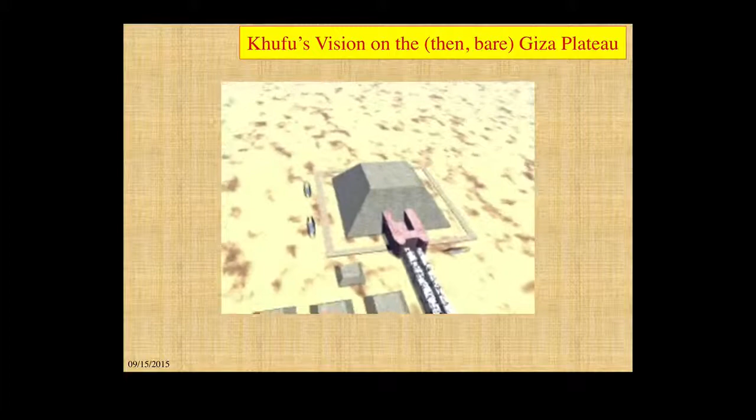What was Khufu's vision of the then bare Giza Plateau, where he wished to be interred in a magnificent complex? In his mind, it probably looked something like this.

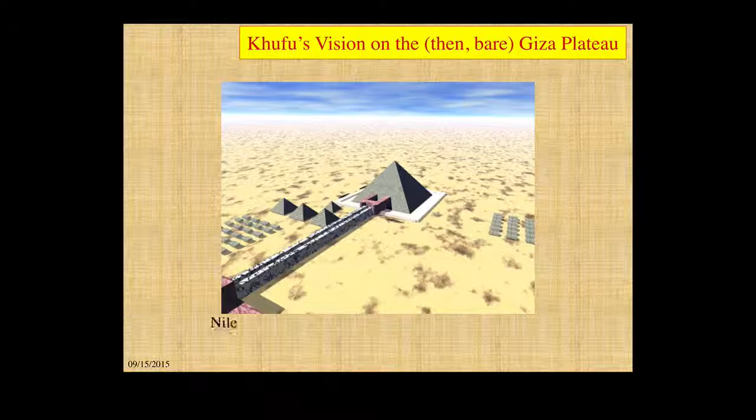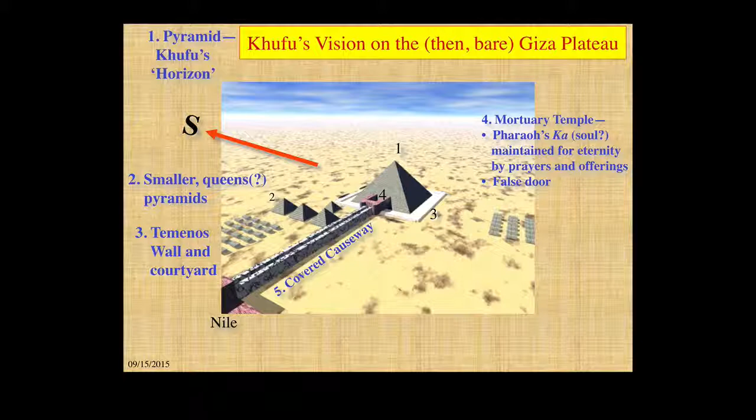It was on the west bank of the Nile, and there was, of course, the pyramid, Khufu's horizon, or Akhet Khufu. There would be smaller Queen's pyramids, a Temenos wall and courtyard, a mortuary temple, a covered causeway for ceremonials, a valley temple, Pharaoh's Ka pyramids, and the city of the dead's nobles' tombs.

And of course, because we were in the middle of switching over from a stellar to a solar mythology, there would be solar boat pits buried in several spots.

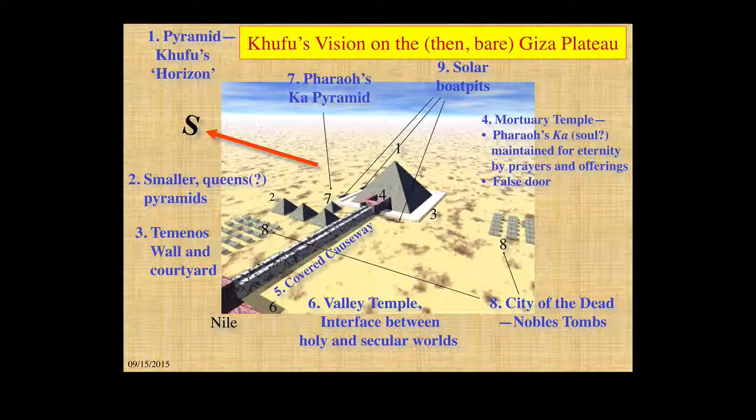So it would appear there was much more to any pyramid complex than just the pyramid. The complex was a psychic projector to preserve and project the king's Ka, his psyche, to the netherworld so that he could negotiate with the other gods by night to ensure a good inundation, on which the whole of Egypt, Kemet in their words, depended, and also to oversee and protect his people throughout Upper and Lower Egypt by day.

The architecture of the pyramid had to serve these essential purposes of the dead king, as well as preserving his remains, his mummy, in his sarcophagus.

The energy to drive this enormous psychic projector was to be provided by a full-time priesthood, with offerings, lustrations, prayers and ceremonies to support, enable, project and recover the king's Ka.

The architecture of the pyramid complex as a whole had to support the priesthood with their ceremonies both during the interment and for 1,000,000 years after.

Akhet Khufu was to be a living, breathing, functioning organism for all time, rather than the naked, partially demolished stone structures we see today.

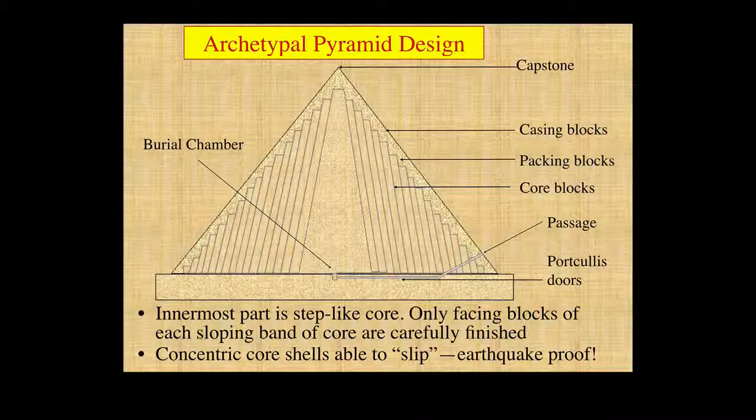Over several hundred years, they had developed the ability within ancient Egypt to build in stone, and they had built many pyramids previously, particularly during the reign of Khufu's predecessor, King Snefru.

He had built pyramids at Meidum and notably at Dashur, and the pyramid design had evolved partly from trial and error, to be honest. And the basic pyramid idea was something like this shown in the diagram.

There was an innermost part, a step-like core. Now this core consisted of a number of concentric shells. The sloping bands were all carefully finished so that they were able to slip relative to each other, and as a result they had become earthquake-proof.

Outside of the shells there were packing blocks to fill in the steps, and then casing blocks of white Tura limestone on the outside to give the impression of impregnability and purity. Oh, and the capstone was probably going to be made of gold.

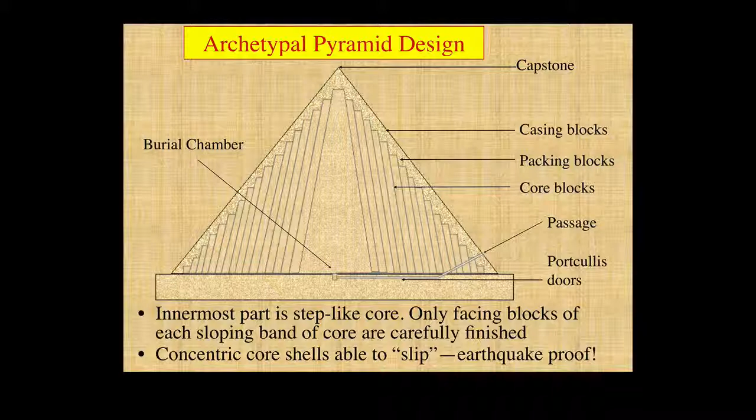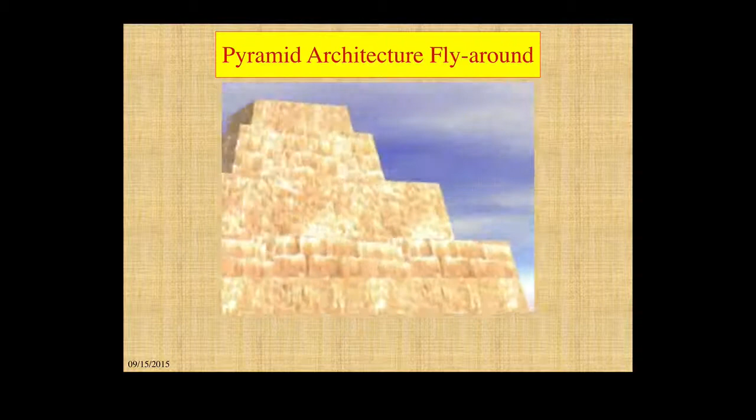We architects love little gimmicks like this one, an architecture fly-around. And that showed the sequence of events in rather rapid order. Notice the gold pyramidion at the top.

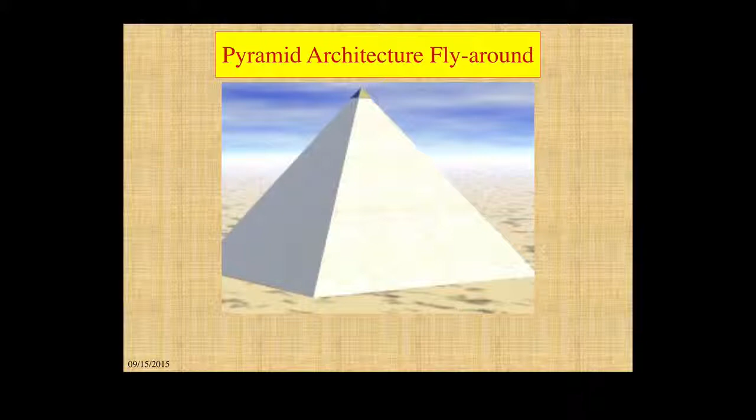That's Khafre's pyramid. And this is systems engineering, Egyptian style. So, models, plans, and the all-essential operations research, which in this case will be carried out really by dynamic modelling.

This is Hemiunu's plan, my plan if you like, system creation without reduction. And we can see that things happen in some sort of order: 1, 2, 3, 4, 5 and 6.

So 1 is establish the customer and user wants and needs. We've seen some of that already because they contribute to conceiving a future vision with the customer, Khufu.

3, establish the emergent properties of the future vision. 4, conceive strategies to realise the requisite emergent properties. And 5, select, correlate, resource and pursue effective strategies to realise those emergent properties. And in the doing of that, we will realise the future vision.

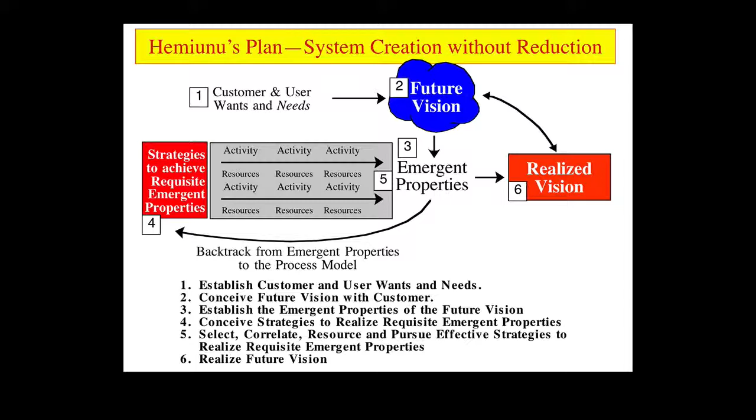Quite straightforward, but there's no reduction. It's all synthesis from the word go.

So, conundrums. How long to raise a pyramid? How many workers? Will those workers work all the year round or just during the annual corvée, which was expected to take place during the inundation?

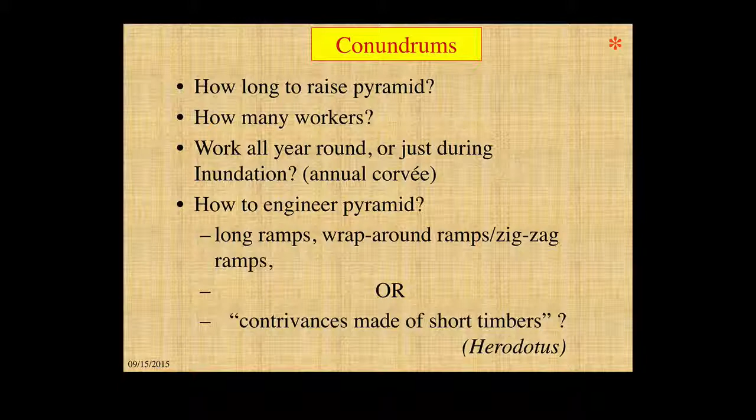How to engineer the pyramids? Would they use long ramps, wraparound ramps, etc.? Or something else? Perhaps contrivances made of short timbers? So, this operations research. Let's have a look.

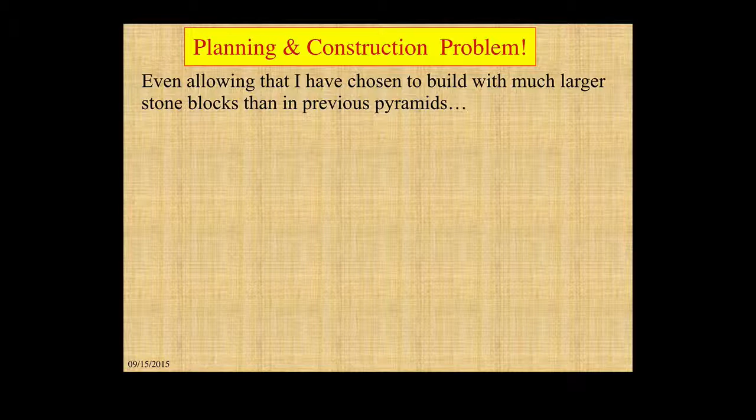There's an obvious planning and construction problem, even allowing that I, as the architect, have chosen to build with much larger stone blocks than in previous pyramids, thereby cutting down the number of blocks. Raising Khufu's pyramid will still take 2.3 million stones at about 2.5 tons average, and that will take 20 years.

Going at 360 days per annum, 10 hours per day, that's 36 stones per hour continuous on average, but that works out at being about 90 tons average per hour continuous for 20 years. That's some loading. During the early phases, it's going to take 200 tons per hour or more in early construction to achieve the 90 tons average long term, because once you get to the peak of the pyramid, towards the tip, you can't load up at 90 tons or anywhere like it. So on average, 200 tons per hour in the early construction area.

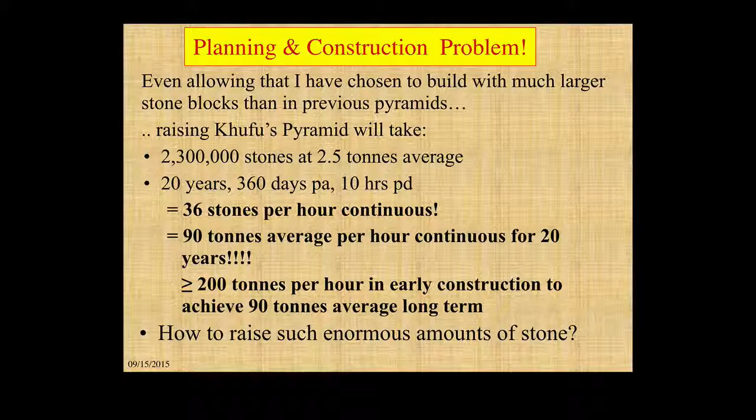How can we possibly raise such enormous amounts of stone? And of course, if one watches lots of Hollywood movies, you end up with the idea that the answer obviously is a ramp. Ramp theories. What have we here?

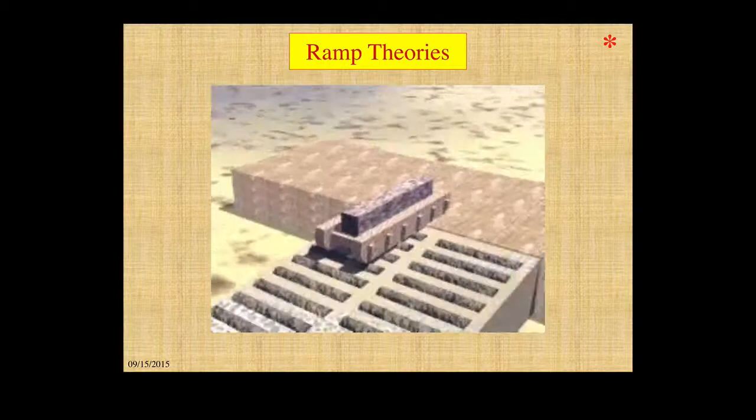The ramp slope, by experiment, has to be less than about 8 degrees. Any greater slope and it becomes too difficult to haul the stones against the severe friction. Ramp remains have not been found at Giza. They have been in other places, and particularly near quarries, but not at Giza by the pyramids.

You can see from the diagram and from the previous video that straight ramps can become enormous as the tiers rise. The whole ramp has to be raised in order to not exceed the slope. You can't just raise the bit near the pyramid. So straight ramps are out.

So the ramps could progress around the pyramid, one from each corner, or zigzag on one face as shown. Note the need for substantial corners to turn stones, which if they're being dragged on sledges, could be anything up to 33 metres from start to finish, which makes for a big corner. As the tiers rise, also, the slope length shortens, and either ramps will become too steep or the tiers must become progressively shorter and stubbier.

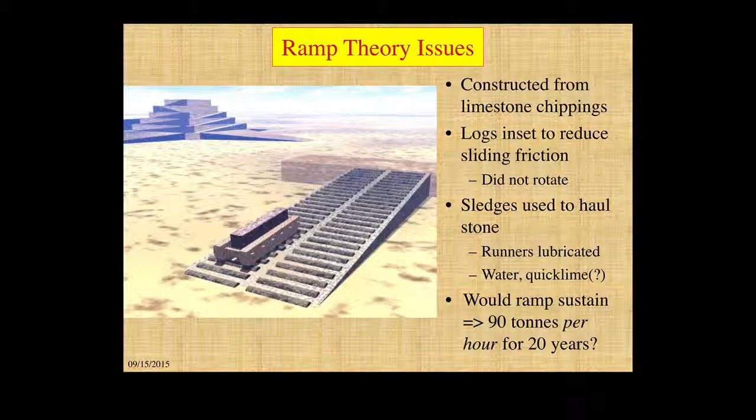Would a ramp built like that sustain more than 90 tons per hour for 20 years? It really doesn't stand up, does it? So there are too many unanswered problems with the notion of using ramps for such a large structure over such a long time. And that's in addition to there being zero evidence of any ramps having been built or used at the site of Khufu. There's no remains, nothing. Perhaps it's time to dispense with the whole idea.

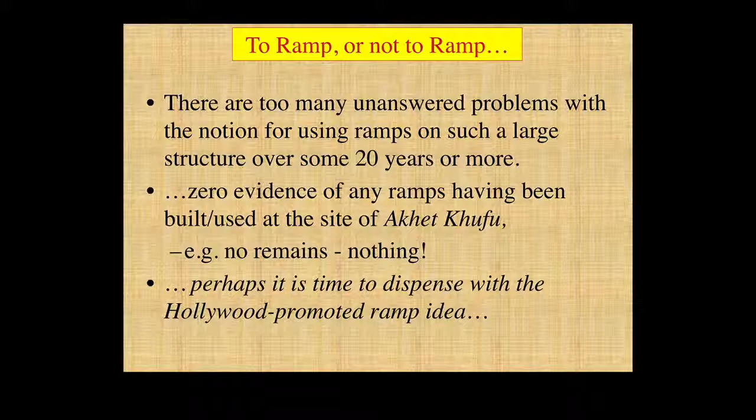Back in 440 BC, which is going to be way ahead of my time, of course, the pyramid was built in steps, battlement-wise, as it is called, or according to others, altar-wise. After laying the stones for the base, they raised the remaining stones to their place by means of machines formed of short wooden planks, which can also be translated as contrivances made of short timbers.

The first machine raised them from the ground to the top of the first step. On this there was another machine which received the stone upon its arrival and conveyed it to the second step, whence a third machine advanced it still higher.

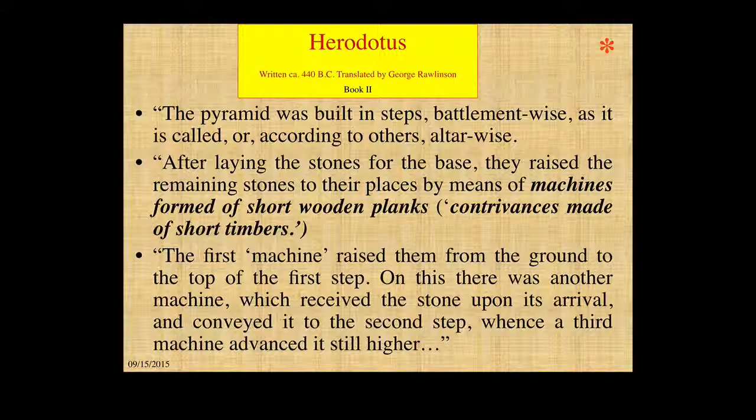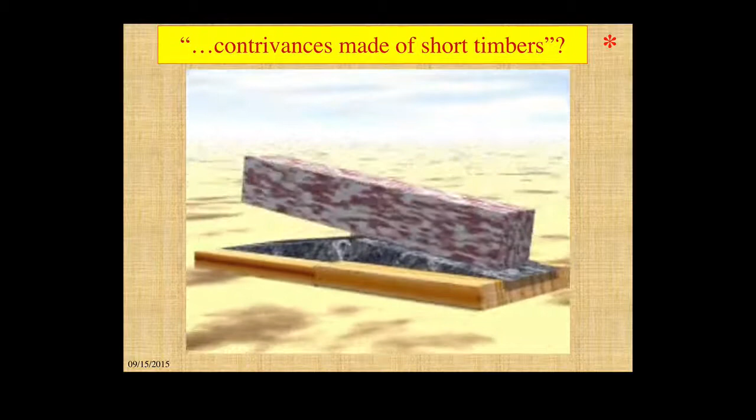So, contrivances made of short timbers. This is one, and this process is sometimes referred to as cribbing. You can imagine men on top of the beam going from one end to the other to tip it.

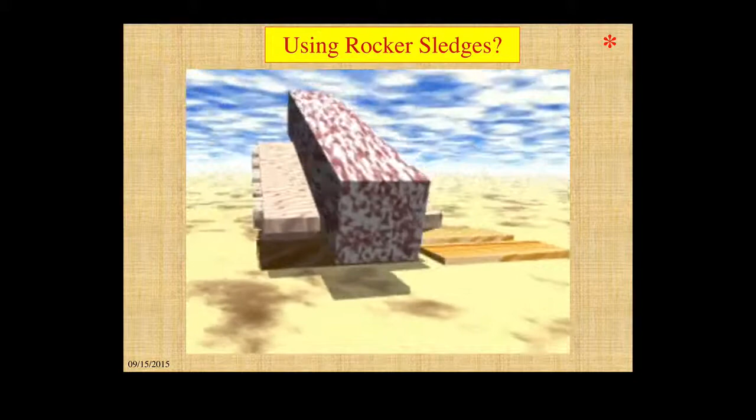Or we can use a rocker sledge. Both these methods are slow but steady and can be very effective. And then the rocker is used to move the stone as well.

If we imagine the stones being moved without the men, it might look rather crudely something like this. There's 3 teams in parallel, raising stone with another team behind, raising more stones, and so on. Tier upon tier.

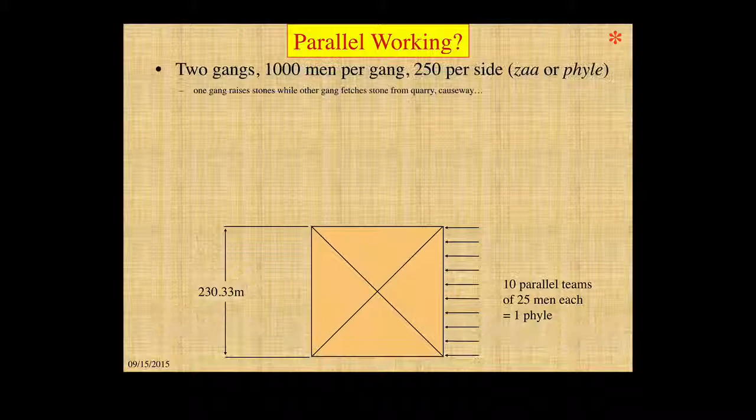And so we can consider parallel working using this cribbing method. As you can see, we could have as many as 40 teams, each raising about 2 tons per hour, which is steep but feasible.

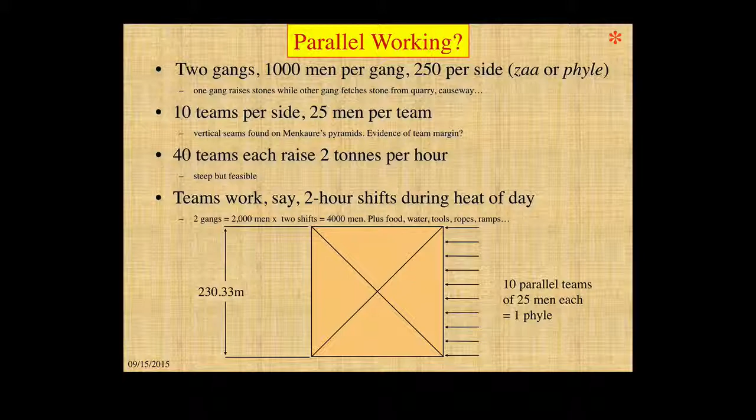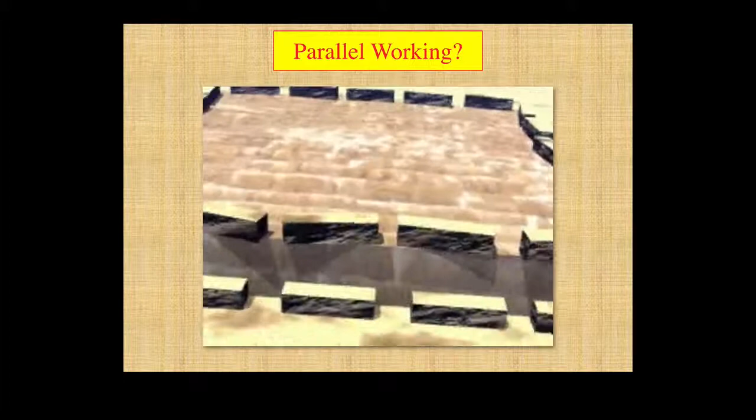And if it's working on all sides, it might look rather crudely something like this, all happening at once. So, needs, requirements, and emergence. Let's look at the central concept of emergence.

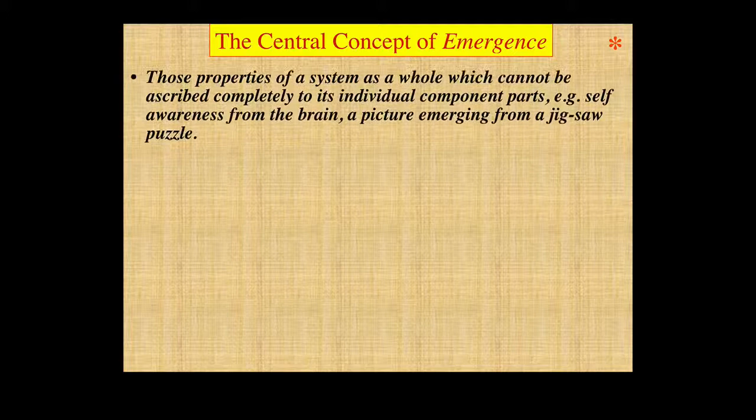Emergent properties are those properties of a system as a whole which cannot be ascribed completely to its individual component parts. As an example, let's look at vehicle emergent properties. They can be physical properties, functional properties, temporal properties, aesthetic properties, behavioural properties, and value properties. We shall look at some further.

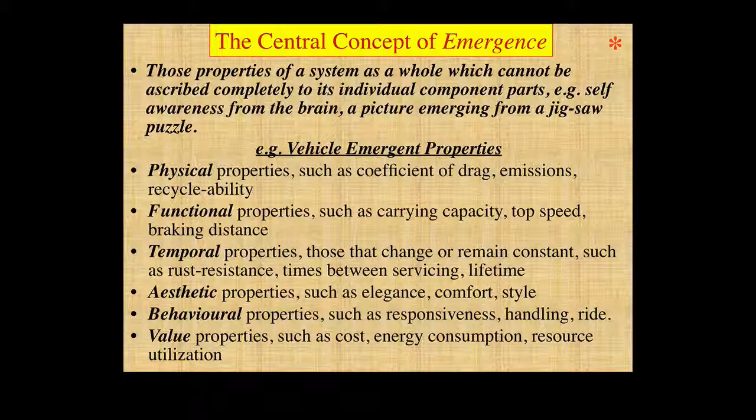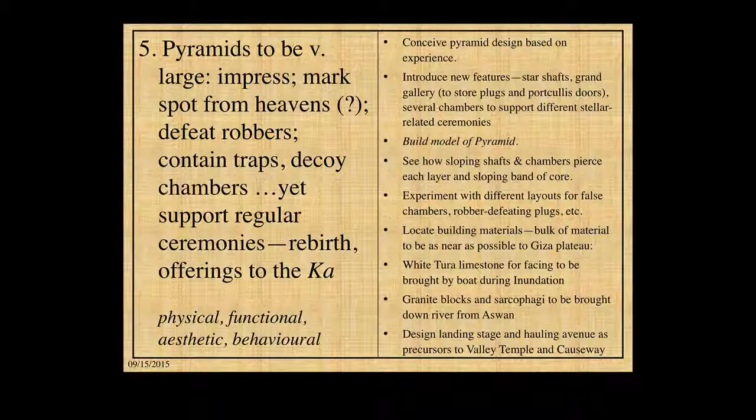The pyramid annually revitalizes the celestial seed. Giza and the pyramids are to contain magic symbols. The pyramids are to be very large, to impress. There are many strategies and techniques here, including building one or more models of the pyramids, or perhaps parts of the pyramids, as we shall see.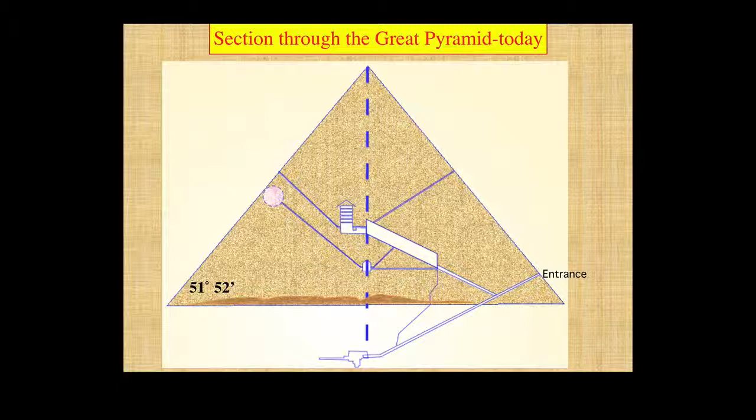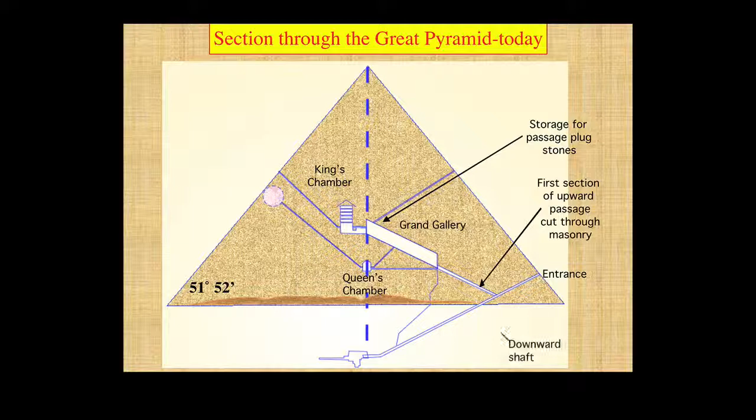This is a section through the Great Pyramid as we might see it today. We would see the slope as being about 51 degrees 52 minutes. There's a Queen's Chamber, a King's Chamber, a Grand Gallery, which we see as storage for passage plugs. There are passages downwards and upwards. There's an escape tunnel and a deserted lower chamber.

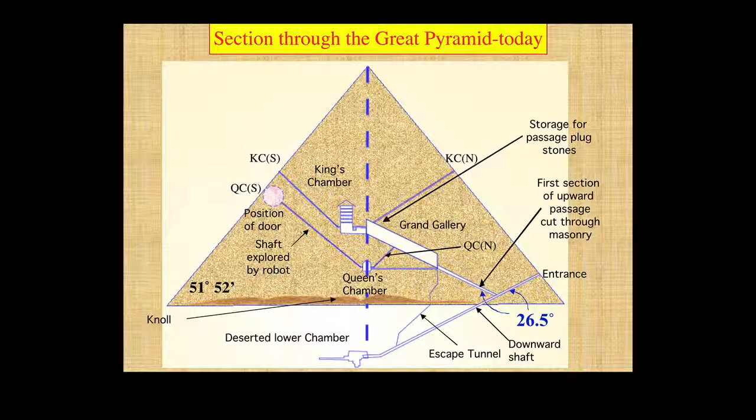There's a shaft that was explored by a robot recently by a young man called Rudolf Gantenbrink, and he found a door up towards the end. The passageways and the Grand Gallery all slope at 26.5 degrees, and there are chambers, Queen's Chamber South and Queen's Chamber North, coming from the Queen's Chamber, and King's Chamber South and King's Chamber North, coming from the King's Chamber. Perhaps a little more to it than we might at first have envisaged.

Those shafts that I've just mentioned, star shafts perhaps, align with the culmination points of a number of distinctive stars: Alnitak, which is in Orion, Sirius, which is the brightest star in the sky, Kocab in Ursa Minor, and Thuban, which then was the pole star. The culmination of Kocab coincides with the heliacal rising of Alnitak, or Orion, or Osiris. Kocab was perhaps to be Khufu Osiris's final resting place in this stellar mythology.

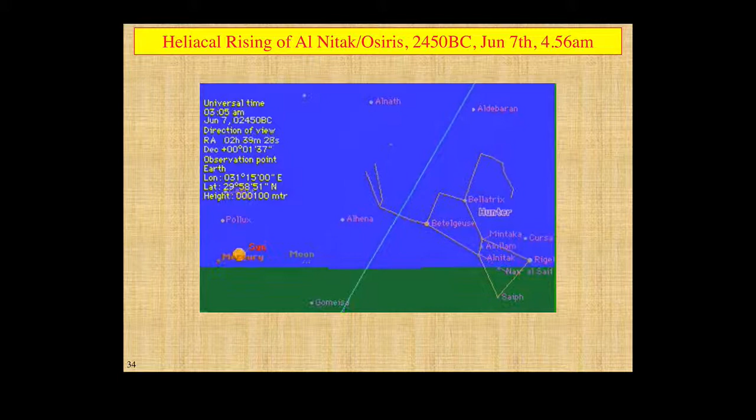Here we see a chart set to 2450 BC, 7th of June, 456, and from that we can see that as Alnitak rises to the horizon, right now so does the Sun. And once again, Orion's nebula and the belt on the right, Alnitak goes up, and once again, there.

Notional Great Pyramid internal structure. You'll find now that the measurements are all in Seked, which you can relate to angle. A seked is given by 7 divided by the tangent of the angle. So 7 divided by tan of 52 degrees gives you 5.5 sekeds, which is the pyramid slope, bottom left-hand corner.

You can see that from the Queen's Chamber we have 2 star shafts, both at 8.5 sekeds. From the King's Chamber we have an asymmetric setup, with one star shaft going to the south at 7 sekeds and the other going to the north at 11 sekeds. And we now know that they all point at particular stars.

I've shown a level there which is not obvious, called the Mound of Creation, which cuts across at the uppermost region, separating the upper from the lower.

Part of ancient Egyptian mythology was that from the primeval waters there emerged the initial Mound of Creation. And this probably happened in Rostau, which is otherwise known as the Giza Plateau.

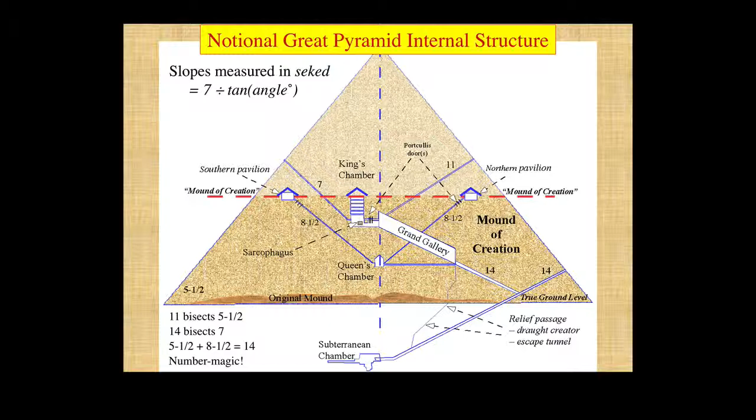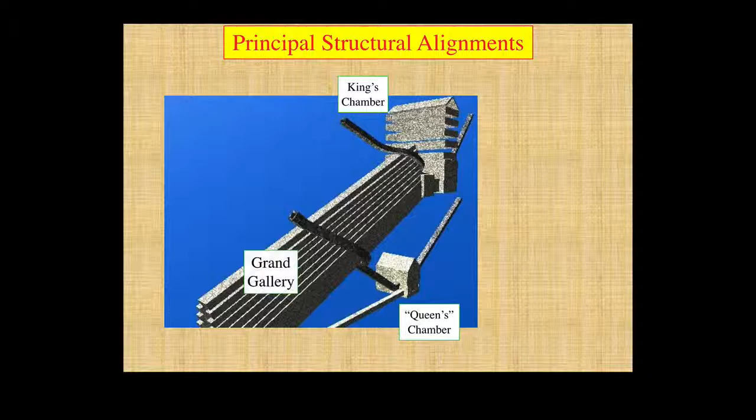Let's look at those principal structural alignments in perspective, because the internal structures are very much coplanar. We can see the Grand Gallery, the Queen's Chamber, the King's Chamber, and the 4 star shafts.

Notice that the northern shafts, the 2 facing us, curve around the Grand Gallery, so they couldn't be used for star sighting, as some people have suggested.

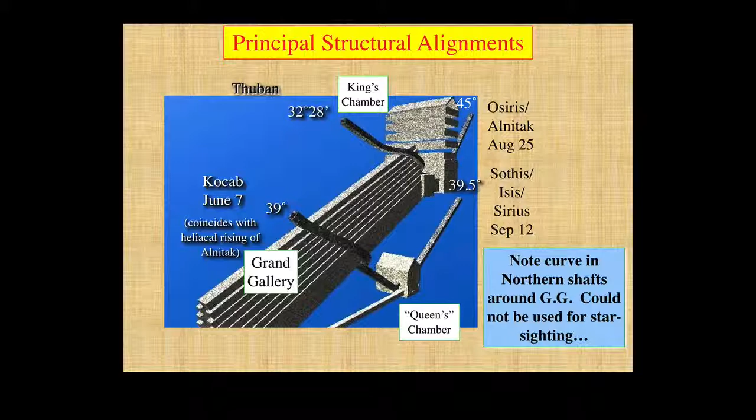There's a list of the annual ceremonies which coincide with the various culminations, and it can be seen that the whole is an annual fertility rite to maintain the fertility and fecundity of Egypt forever.

So the height of the pyramid is 7 times 40 cubit measures, which is 280 cubits. Whereas the half width of the pyramid to the centre line is 5.5 times 40, which is 220 cubits.

Now we've already seen that the slope of the pyramid is 5.5. And if you look at that, it's 5.5 times 40 over 7 times 40. And that is the cubit ratio, giving you the seked slope.

If we start looking at the vertical budget, we can see that above the internal mound that would already exist in there, we get up to the bottom of the Queen's Chamber passage with 43 cubits.

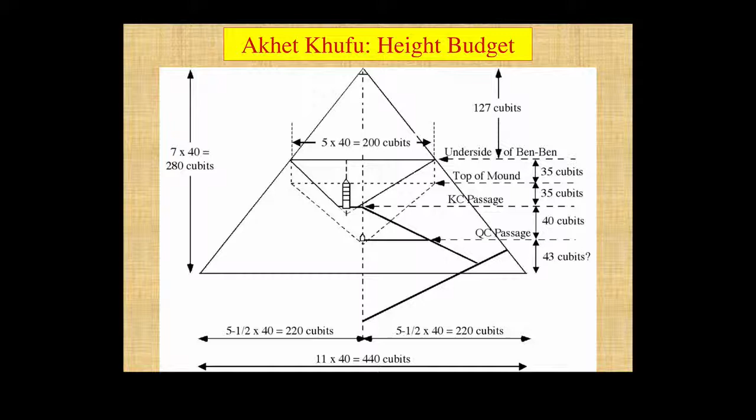To unravel this and see what's going on, let's look a bit closer, and let's look at the Queen Chamber's level just extracted from that diagram. 200 cubits wide, so 100 cubits half width.

The 2 star shafts are both at 8.5 seked, and there's the Queen's Chamber at the bottom, and there's an apparent anchor point just under the Queen's Chamber which aligns both shafts. Very symmetrical, and I've done the calculation of the drop using the Egyptian method.

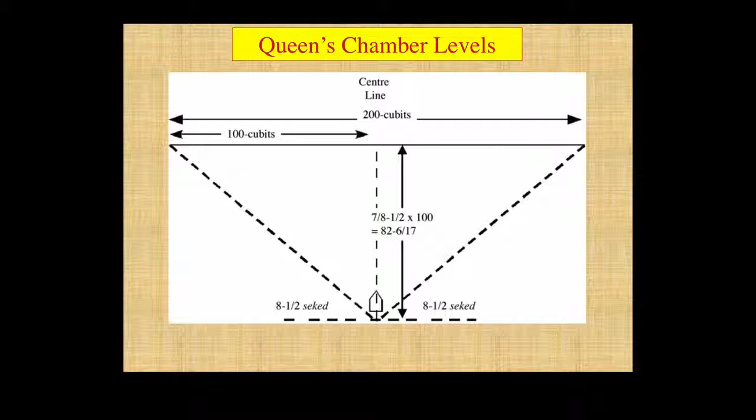That would be 7 divided by 8.5 times 100, which is 82 and 6/17 cubits. And that has to be precise to give you the correct slope.

Now that was symmetrical, but the King's Chamber is anything but symmetrical. In fact, the whole of the King's Chamber and the relieving chambers and the cap on top are all shifted off by a mean of 22.22 cubits to the south, to the left in this picture.

And you can also see that by doing that and having the right drop, you get the 7 seked to the left, to the south, and the 11 seked to the right, to the north, coinciding with another anchor point just underneath the King's Chamber.

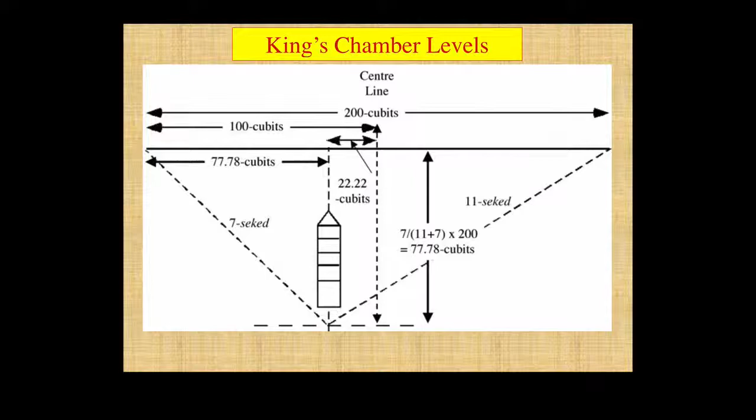And the vertical drop has to be precise again. That's 7 over 11 plus 7 times 200, which is 77.78 cubits. This is delightful work, very accurate and quite elegant.

So how did they go about building that grand gallery? Well, we'll have a look at that in a bit more detail, because this has puzzled people for many years.

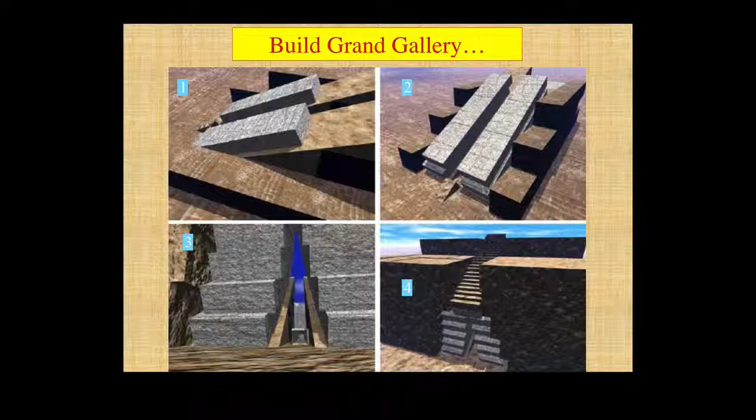Another look at it in perspective, and you can see the rising passage, centre right at the bottom, going into the Queen's Chamber. The actual Queen's Chamber is obscured in the masonry, but you can see the beginnings of the corbels to left and right of the passageway going upwards.

Another view a little bit later on, you can see 4 rows of corbels beginning to get into place, and a staircase having been put in the middle.

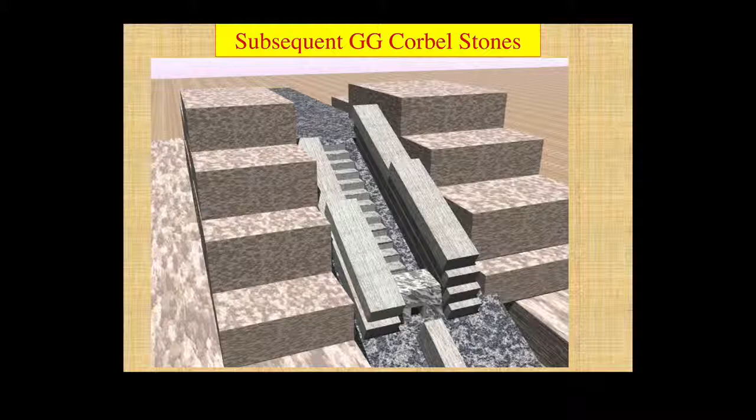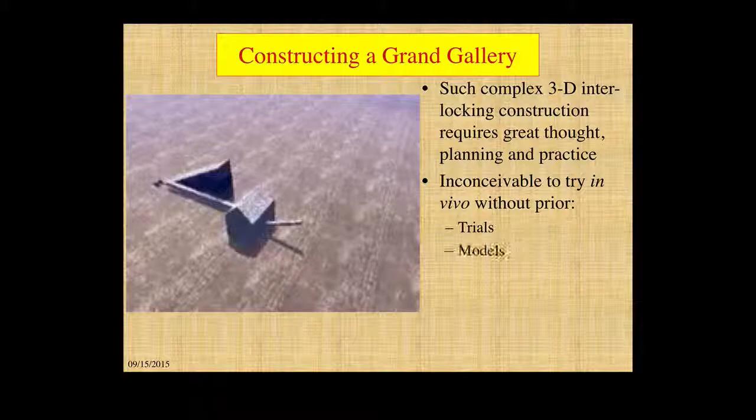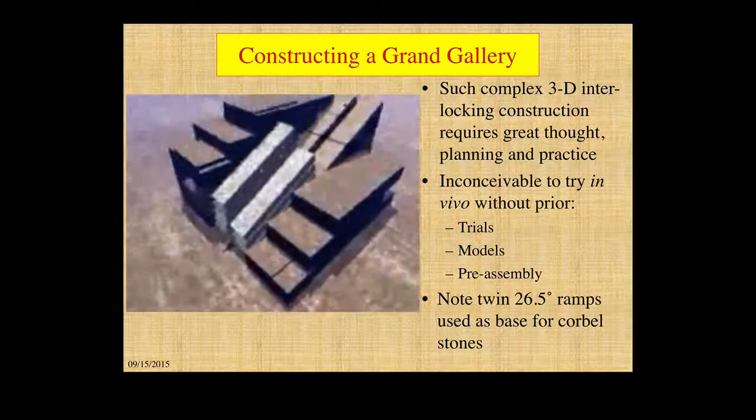Let's go look at the construction process in model form, but dynamic. That's the Queen's Chamber. We obscure the Queen's Chamber, we build it in, raise all the bits.

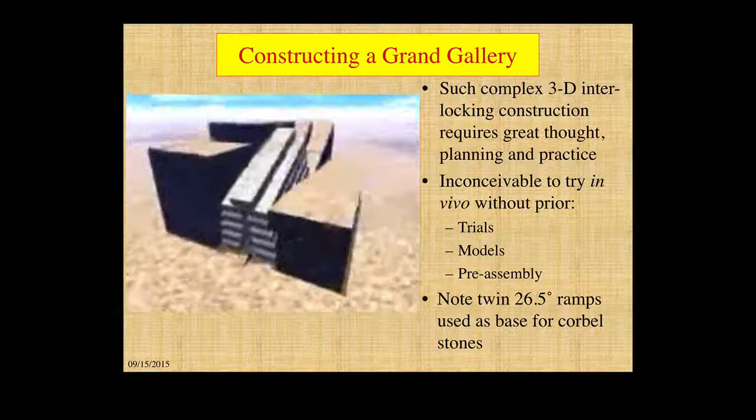Now let's watch that undo, because it's easier to see what's going on when you undo it. Take the building walls down, reveal, take all the bits off of the corbels, and there's the Queen's Chamber and one of the passageways sticking up to the right.

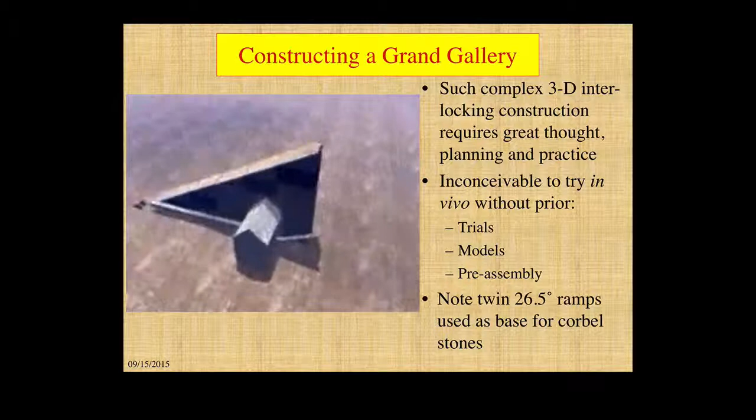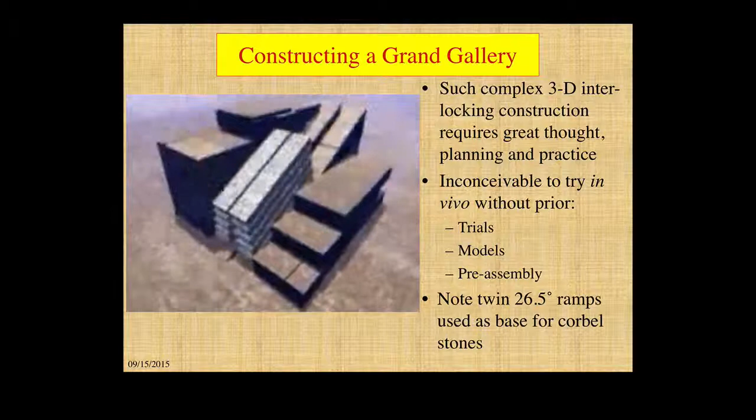Again, build the building walls and raise the stones, and raise all the stones and cap it, and then build it in.

So Khufu's Corbelled Grand Gallery, it's enormous, and it's a masterpiece of the stonemason's art in this or any other age.

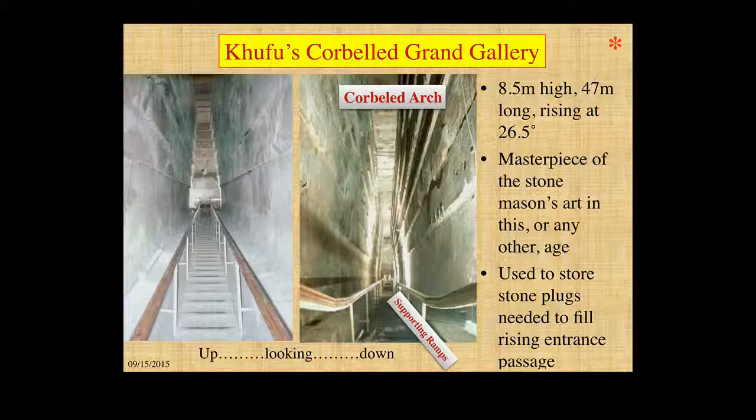Looking up and looking down, you can see the corbelled arch right at the top. You can see that each of the corbelled stones has been brought in by quite a gentle amount each time. You can also see the remainders of the 2 ramps, which in both photographs are supporting the railings, left and right, either side of the staircase, although of course the railings are modern.

So by night, Khufu would be in his King's Chamber and he would be free to roam to the southern netherworld by his star shaft or to the northern netherworld by his star shaft, both of which are presumed to go to the outside and to pierce the outside of the pyramid.

By day, he would come down the Grand Gallery, in through the passageway into the Queen's Chamber, and from there, using the two shafts, he could visit either Upper Egypt or Lower Egypt. That's one of the reasons the shaft angles would have been exactly the same as each other, to give parity between Upper and Lower Egypt.